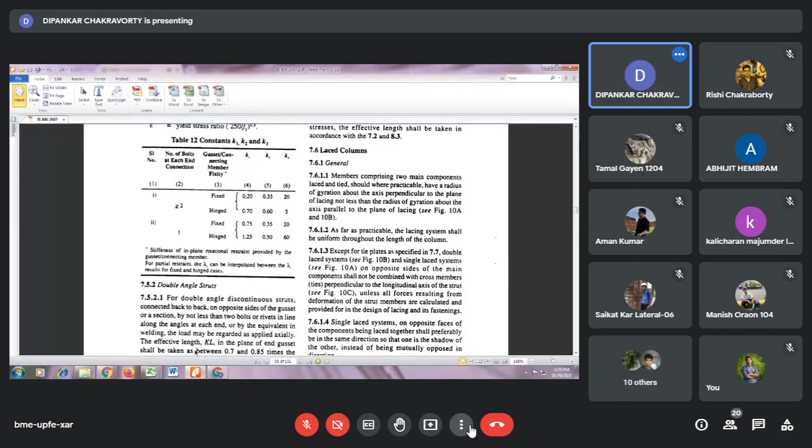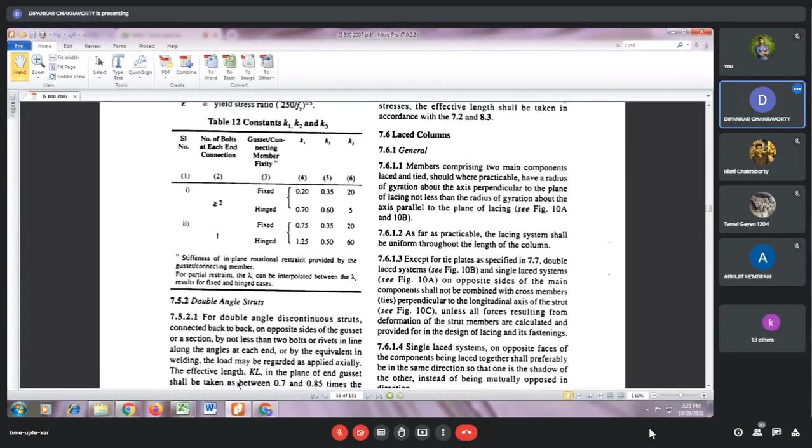If you want to make a compound column, rather the components of the compound column, to behave as a single unit, then you have to either lace or batten the individual components. The design of lacing and design of battens are very easy topics. Just keep in mind, you can note it down, that batten is basically a small beam and lacing members are basically small truss members.

This you have to remember. I'm repeating: in order to make the different components of a compound column behave together as a single unit, you need to batten them or lace them. Now, lacing members are inclined members which basically behave as truss members, meaning axially loaded members, and batten members basically behave as small beams.

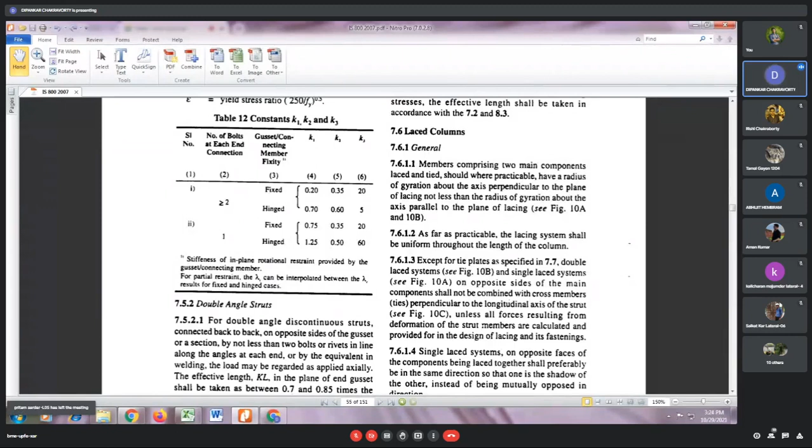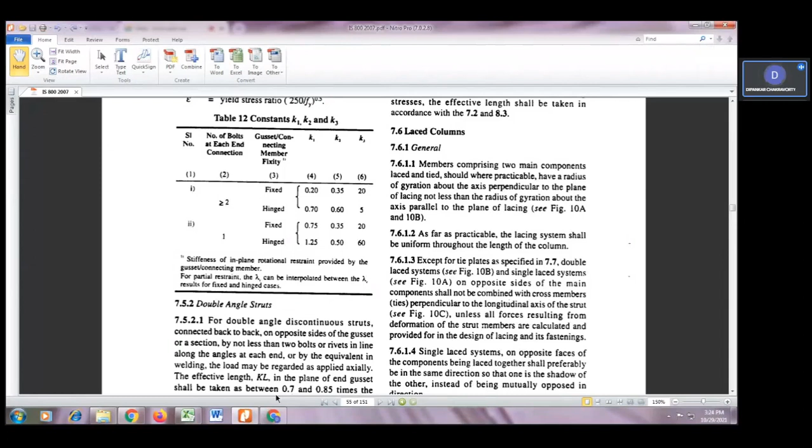Now, if you want to hold two portions of a column together by using lacing or batten, then the lacing or batten system must be capable of resisting a horizontal load which is 2.5% of the vertical maximum axial force on the compound column. I'm repeating: if a vertical compound column has an axial force of 100 kilonewton, then the lacing or batten system must be capable of resisting a horizontal shear of 2.5 kilonewton.

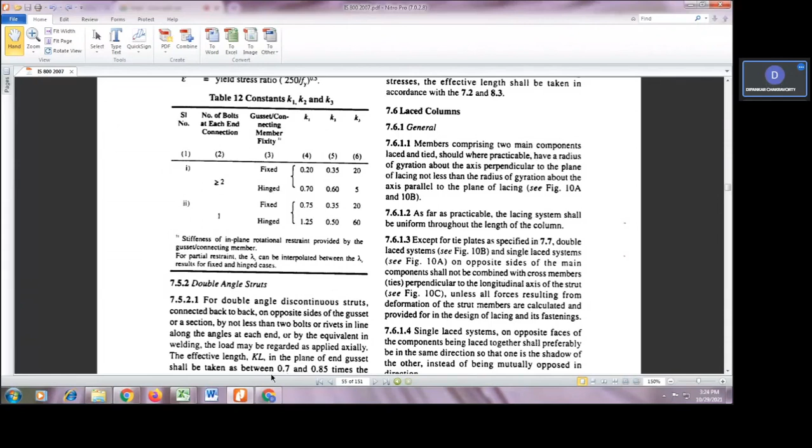Now, in a particular compound column, if in addition to the axial force some shear force is there, which will be there in the present case - in the present case there are wind forces and therefore horizontal shear itself is there - in that case you have to take that horizontal shear and add 2.5% of the axial force. Is it clear to you?

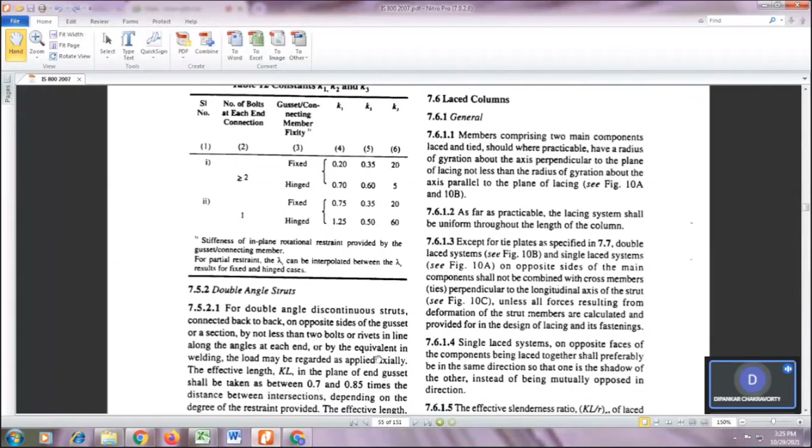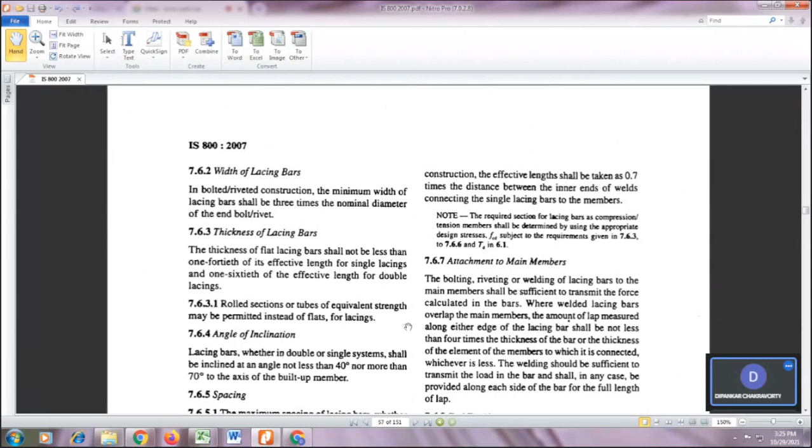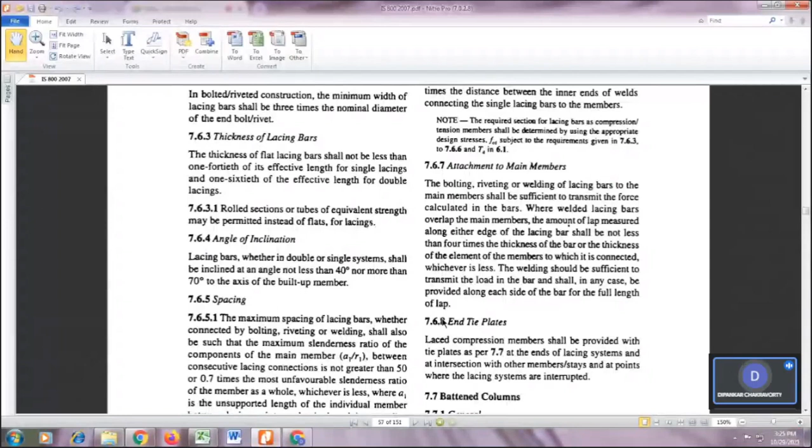Yes sir. Initially I have told you how a lacing or batten plate behaves - they behave basically as axially loaded members, truss members, and beam members respectively. Then I have told you what is the basic design criteria of lacing and batten plates: that they must be capable of taking a horizontal shear equal to 2.5% of the axial force, and if there is actually a shear acting, then that has to be taken also.

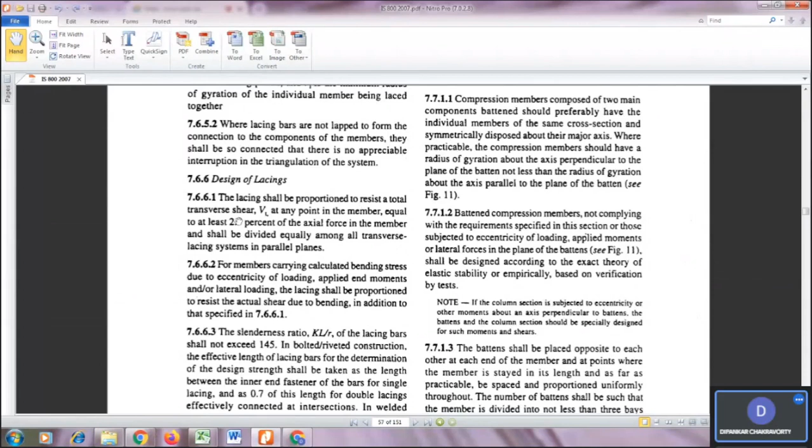Clause 7.6.6.1: The lacing shall be proportioned to resist a total transverse shear VT.

Stop. What does transverse mean? Transverse means any force which is acting perpendicular to the main length of the member. That is called transverse. Continue reading.

At any point in the member equal to at least 2.5% of the axial force in the member, and shall be divided equally among all transverse lacing systems in parallel planes.

Now read clause 7.6.6.2, the next one. For members carrying calculated bending stress due to eccentricity of loading, applied end moments and/or lateral loading, the lacing shall be proportioned to resist the actual shear due to bending in addition to that specified in 7.6.6.1.

Did you understand? So whatever shear force you have calculated - you have solved the compound column, you have solved the crane leg, and therefore you know what is the horizontal shear at the base - that shear you have to take.

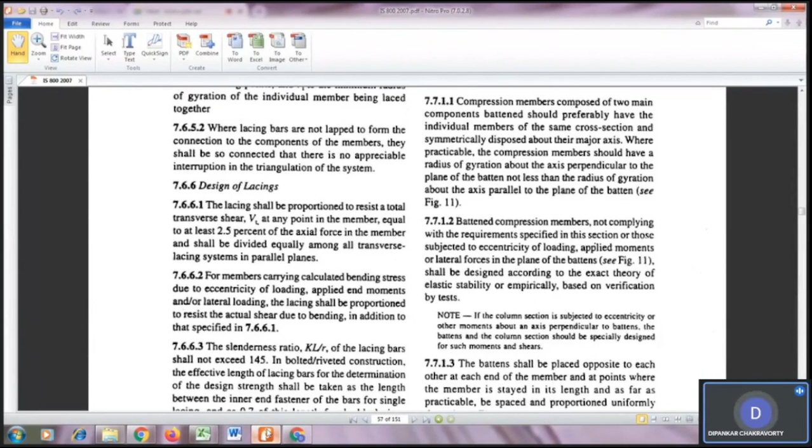In addition to that, the total maximum vertical reaction that you have got in the compound column, 2.5% of that has to be added. So against this particular shear force, the lacing has to be designed.

Now there are certain restrictions so far as the inclination of the lacing is concerned, the thickness of the lacing is concerned, and the width of the lacing is concerned. Okay, just don't worry about it for now.

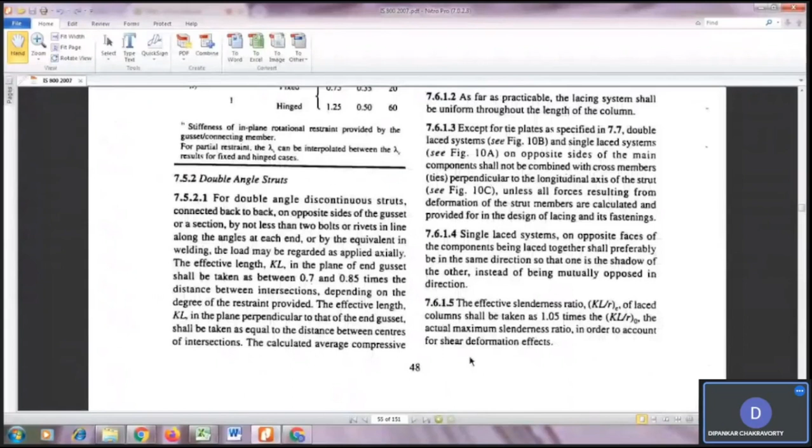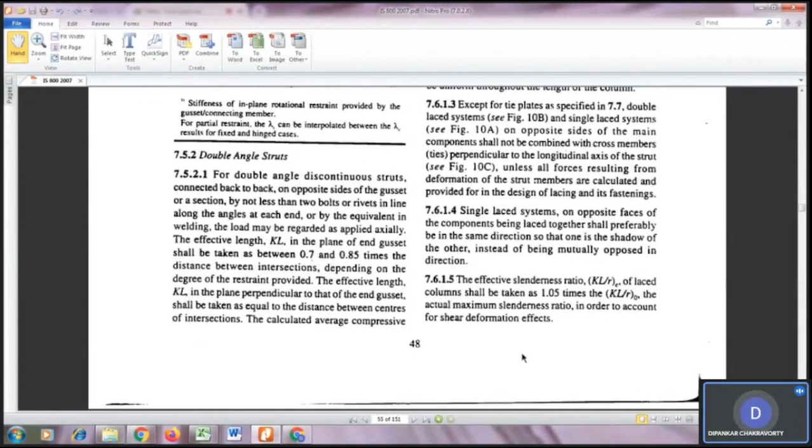The slenderness ratio of a laced column should be increased by 5%. Whenever you are lacing a column, you have two columns side by side, then they are laced. So you calculate Ixx and Iyy, then Rxx and Ryy, and then lambda xx by lambda yy along the two directions, and you multiply them by 1.05.

In bolted or riveted construction, the minimum width of lacing bars shall be 3 times the nominal diameter of the end bolt or rivet. Right.

So the width of the lacing bar has got a minimum width restriction, but since we are welding it, there is no minimum width, but we can go for an approximate width.

I'm elaborating. You tell me, in your compound column, what was the section of the individual legs? The compound column consisted of two members, so what are the sections of the individual legs?

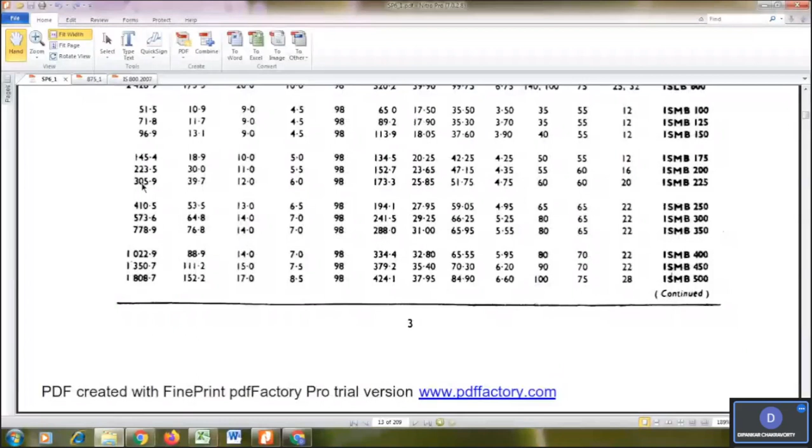সেটা কি তোমরা দেখেছো? হ্যালো, তোমরা এটা দেখতে পাচ্ছো? Is it visible?

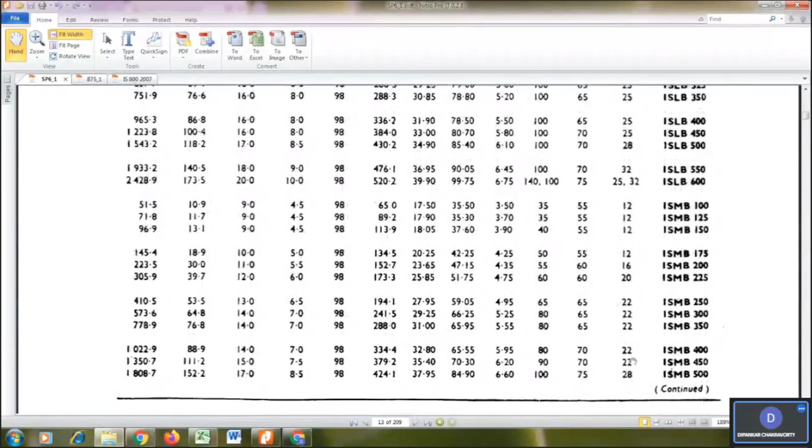Yes sir. Okay. Say for example, your individual members are ISMB 500. So if it is ISMB 500, then you see the maximum size of flange rivet কত বলো? কত? 28. And therefore তোমার লেসিং থিকনেস কত হবে বলো?

লেসিং প্লেটের উইডথ কত হবে? 3 into 28, তাই তো? 3 into 28 is 84. You can go for 100 mm width of lacing plate.

Got the idea? In this particular case, we are not using bolts, we are not using rivets, but just to get a tentative idea, you know the section which you have used. Corresponding to that section, what rivet is suitable, although we are not using rivets, but you can get the diameter of the rivet which would have been required, and thrice of that will give you the width, but that is the minimum width, so you round it up to a decent figure.

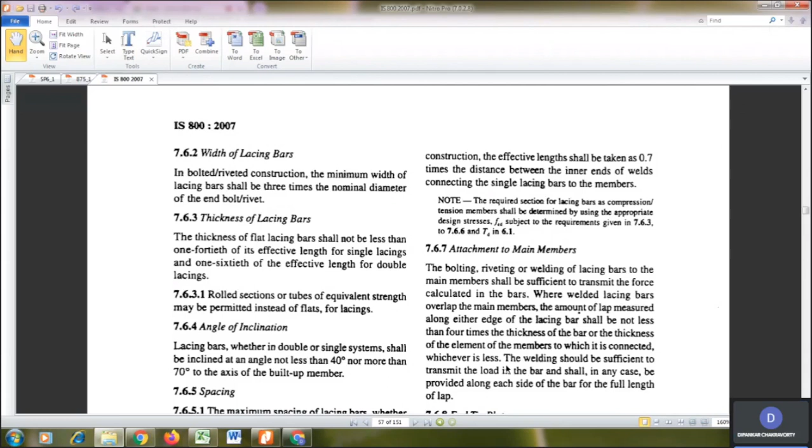Okay, now come to thickness of lacing bar. Rishi, পরেরটা কি বলেছে? The thickness of flat lacing bars shall not be less than 1/40th of its effective length for single lacings and 1/60th of the effective length for double lacings.

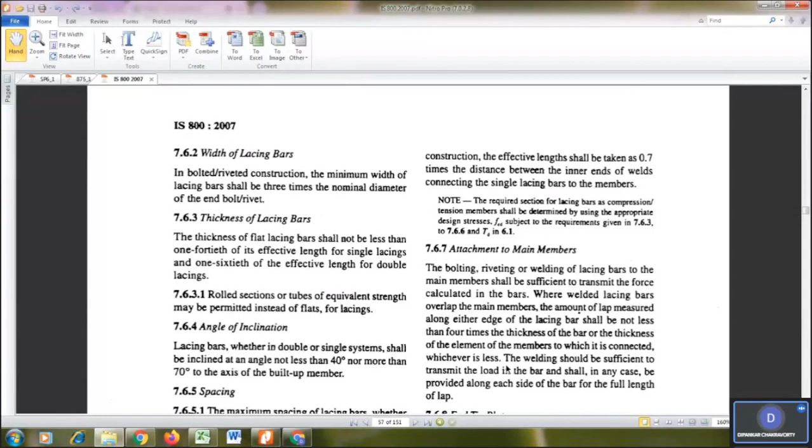Right. আচ্ছা, you tell me that the thickness of the lacing bar shall not be less than 1/40th of its effective length। আচ্ছা, এবার কি হচ্ছে শোনো, if you look at the lacing plates, if you look at the diagram of the lacing plates, you can either bolt them or you can weld them।

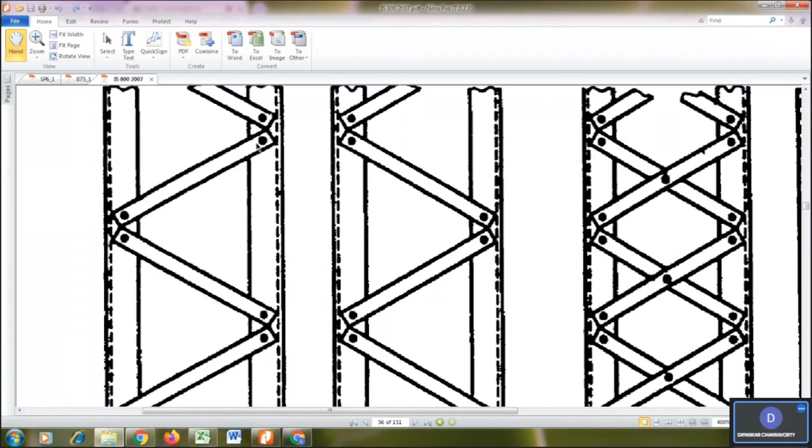Now if you weld them, please look here, if you weld them, then you will weld it all around, তাই না? You will weld it all around। Now if you weld it all around, then a fixity will be created। Now if a fixity is created, then whatever geometric length is there, you can take the effective length as 0.7 of that length। Now let us see what effective length the code has specified।

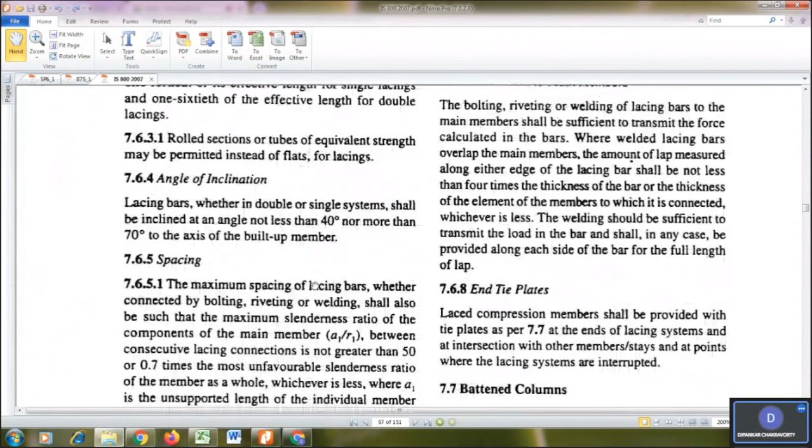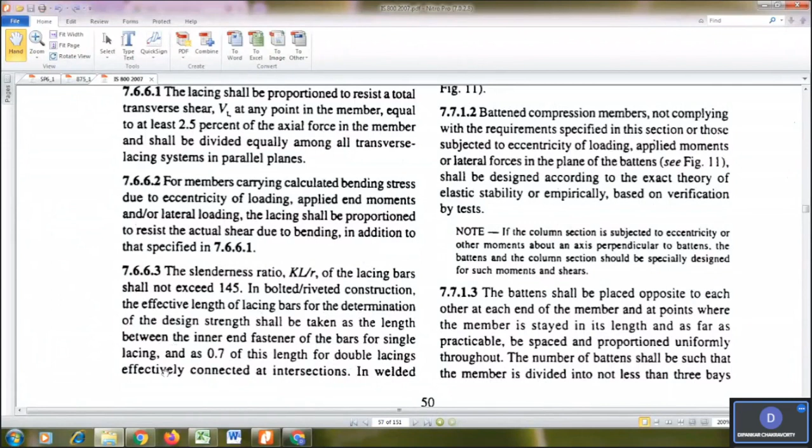Effective length দেখো কোনো কিছু বলেছে? রাইট, ঋষি এই জায়গাটা জোরে জোরে পড়ো। ইনওয়েল্ডেড বলো, ইনওয়েল্ডেড পড়ো।

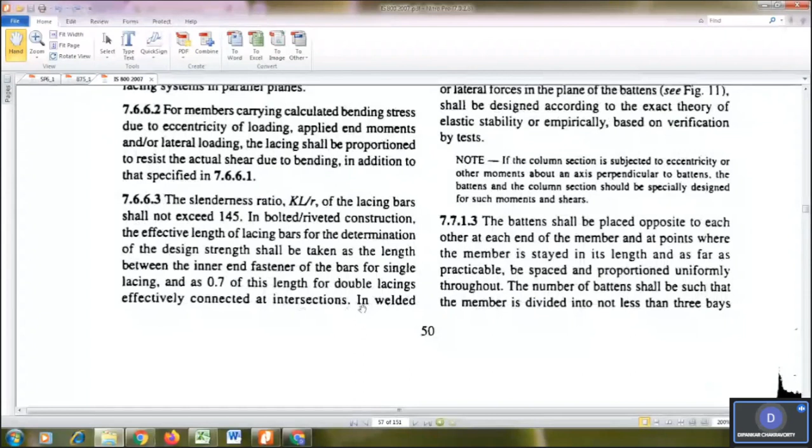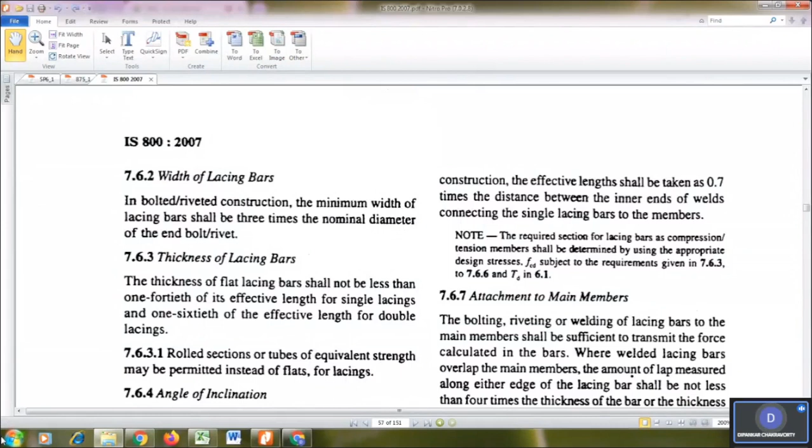In welded construction, the effective length shall be taken as 0.7 times the distance between the inner ends of welds connecting the single lacing bars to the members। Right, inner ends of the weld, তাহলে বুঝতেই পারছো ইনার এন্ডস মানে হলো, এই যে লেসিং প্লেটটা আছে, এই যে জায়গাটা ইনার এন্ড, আর এই যে ইনার এন্ড, you take this length and multiply it by 0.7। Okay, so then you get the effective length।

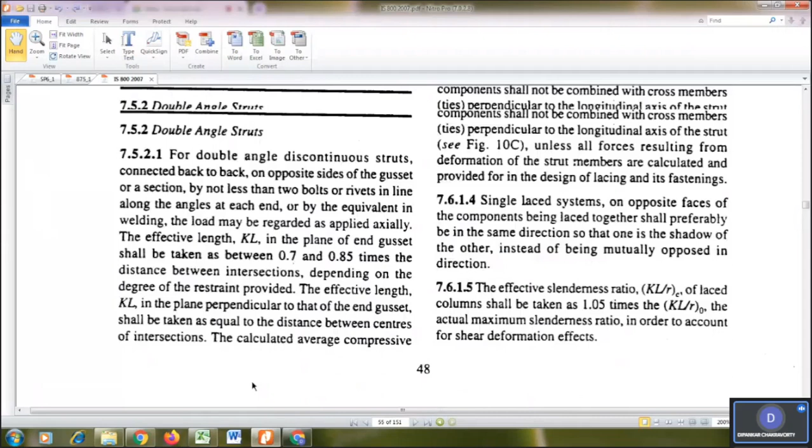Now you tell me, you know the effective length, so once you know the effective length, then for single lacing you can divide it by 40। So 1/40th of the effective length, that is the minimum thickness of the lacing bar। But obviously you can provide something more। If you get say 12.2 millimeter or whatever, you can provide 16 millimeter thick or 20 millimeter thick plate।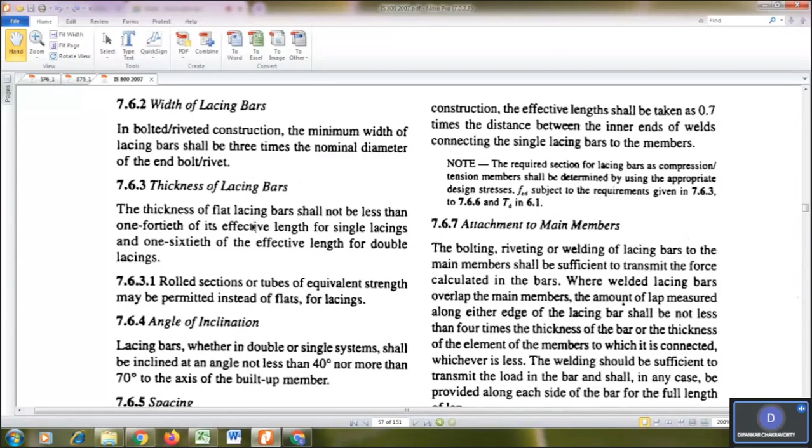So the cross section of the lacing bar, now I know the width, I know the thickness, so the cross section I know। Now how the lacing bars will be placed, এটা একটু পড়ো, জোরে পড়ো।

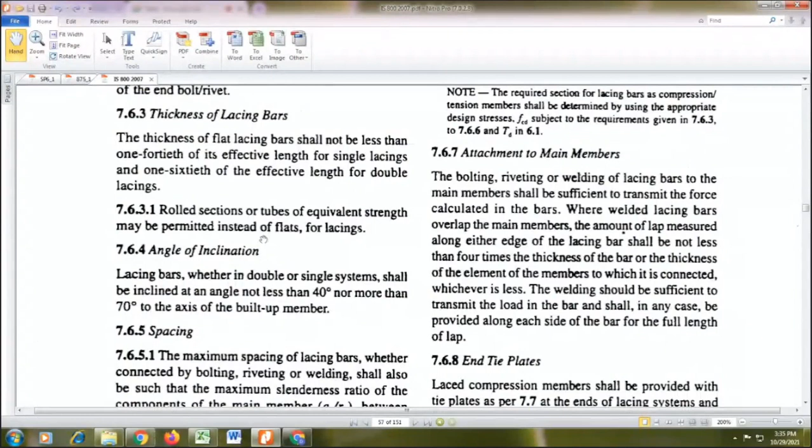Lacing bars, whether in double or single systems, shall be inclined at an angle not less than 40 degree nor more than 70 degree to the axis of the built-up member। Axis of the built-up member, তার মানে হলো এই যে axis, তো এই axis, বুঝতে পারছো, vertical axis, এই যে axis।

So you have to see that the inclination of the lacing bar shall be between 40 degree to 70 degree with the axis of the main member, which I personally normally make as 45 degree। তোমরা বুঝতে পেরেছো না পারোনি বলো, please tell me।

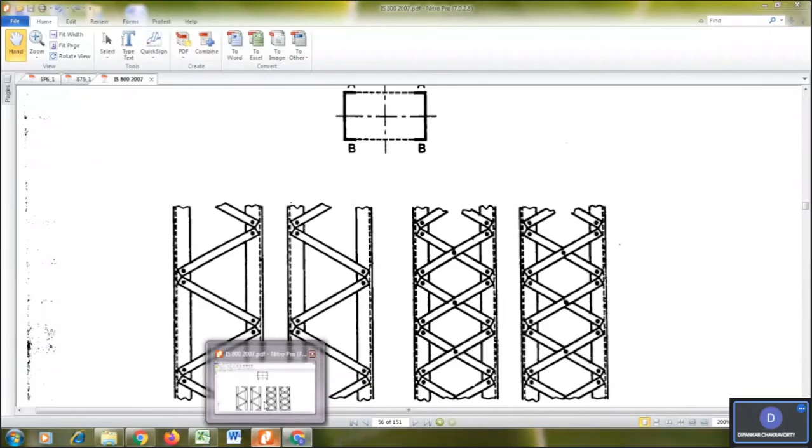So the orientation is known, but there is another criteria, which is this criteria, which is very important। ঋষি পড়ো জোরে জোরে। The maximum spacing of lacing bars, whether connected by bolting, riveting, or welding, shall also be such that the maximum slenderness ratio of the components of the main member between consecutive lacing connections is not greater than 50 or 0.7 times the most unfavorable slenderness ratio of the member as a whole, whichever is less।

Right, whichever is less। আচ্ছা, এবার শোনো, you know that, see, we have connected the members by lacings, but between the lacings this portion is unsupported। Do you agree?

This individual leg is unsupported between the lacings. So for this single member, you take the RYY value, that is the worst RYY value. And if you take the entire column, meaning the compound cross section, multiply that by 1.05, because in a laced column the slenderness ratio must be multiplied by 1.05. You take the entire column, calculate lambda xx and lambda yy, and multiply the greater lambda, because worst lambda means greater lambda, by 1.05.

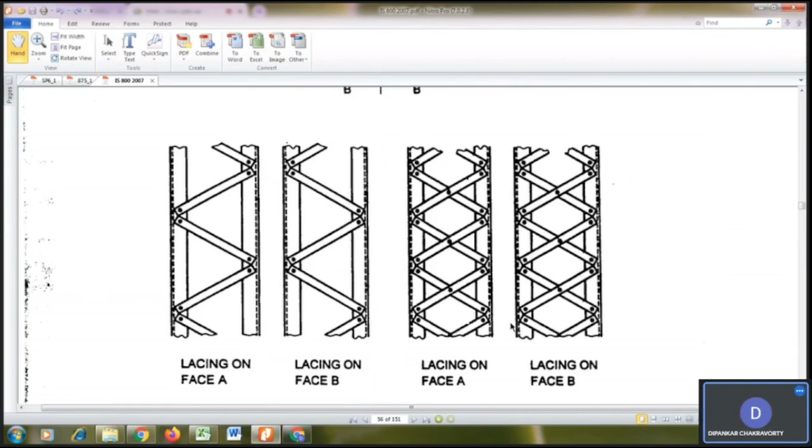So try to understand what this clause is telling. Listen carefully. They want you to keep the inclination of the lacing at an angle between 40 degree to 70 degree with the axis of the main member. Moreover, the portion of the main member between the lacing connections - that is, the part between two lacing points - if you take the slenderness ratio of that part, it cannot exceed 50, and it cannot exceed 0.7 of the most unfavorable slenderness ratio of the member as a whole.

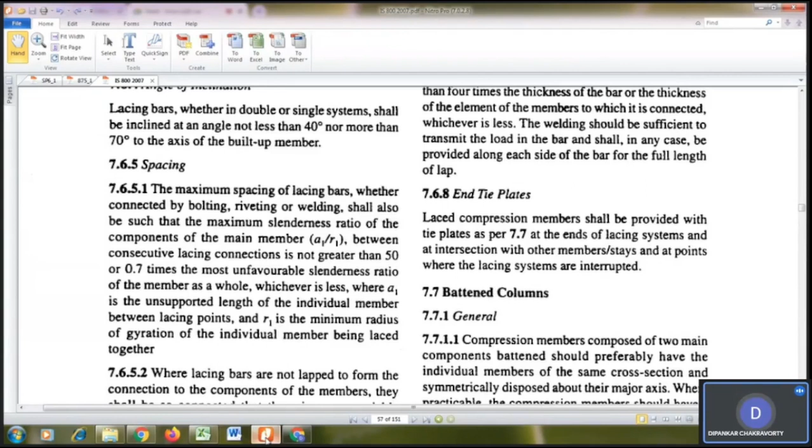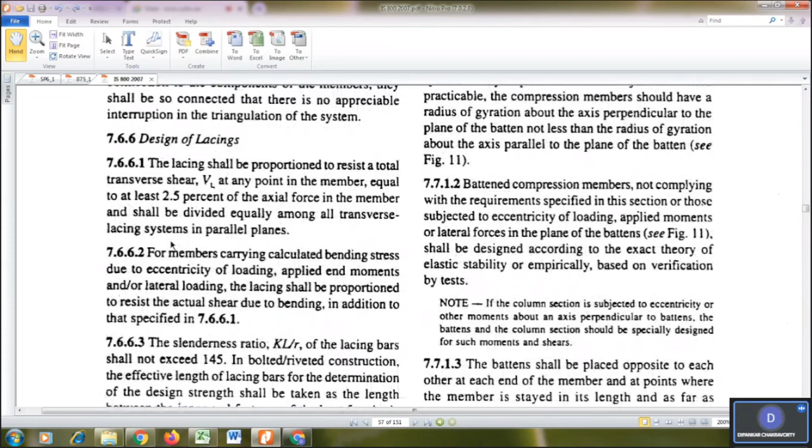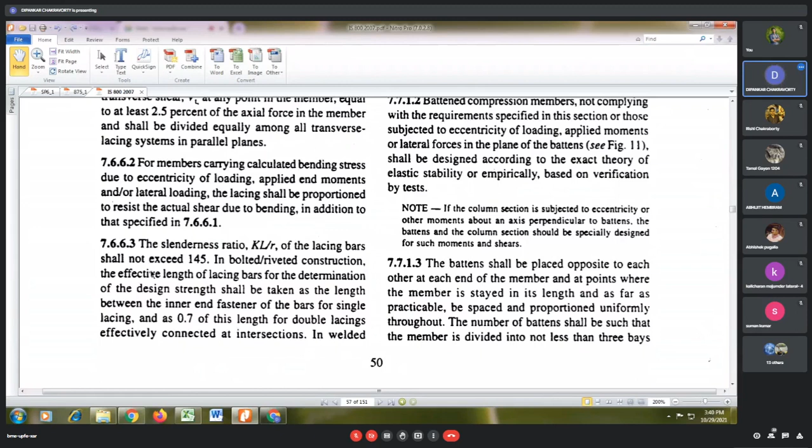Come on, push ahead. So my configuration is totally complete, and I know what force I have to take - 2.5% of the axial force plus the horizontal shear. Now, as I told you, the lacing members should be designed as compression members and tension members, and you know that if a particular member is safe in compression, it is always safe in tension if the force is the same. Now I will come to the force, and then I will tell you how to design it.

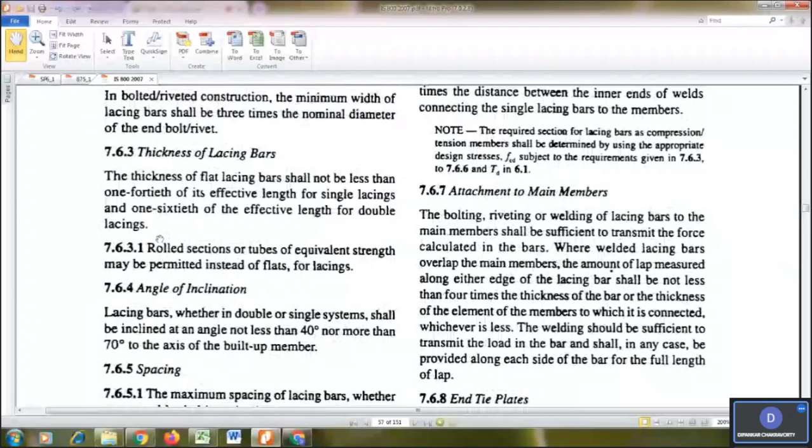Just hold for a second.

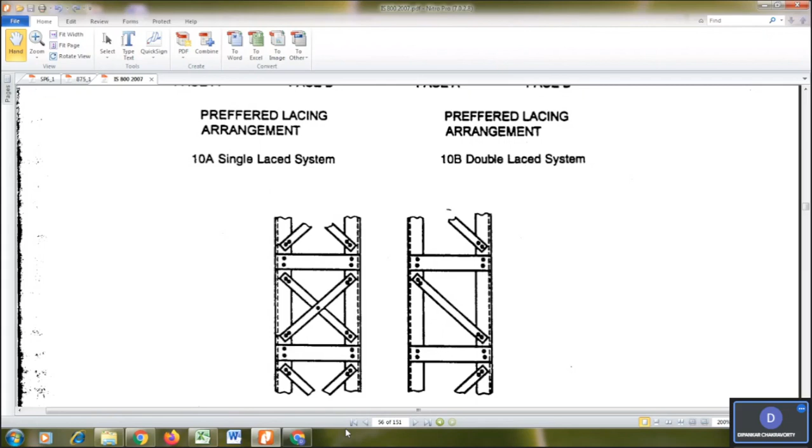Please look into the figure which I have sent you. Have you received it? Yes sir, you have seen the figure?

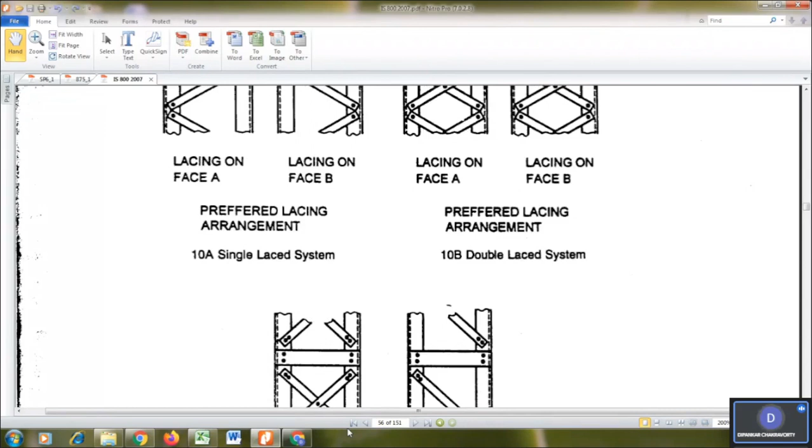Okay fine, I have written VT. You know what VT is - VT is 2.5% of the axial force plus the actual shear. Now see, if we look at the plan, we'll have lacing here and lacing there also. So there are two planes of lacing, and therefore I have taken VT by 2. Is it clear? Yes sir.

Okay, now when that shear is acting away from the member, the lacing members will be subjected to tension, and when the shear is acting towards the column, the lacing members will be subject to compression. The value of theta, which lies between 70 degree to 40 degree, I normally personally take as 45 degree, but I always check whether the slenderness ratio of the individual component is less than 50 or 0.7 times the worst slenderness ratio. So please tell me whether you can solve for the tension and compression, which will be of equal value, equal magnitude.

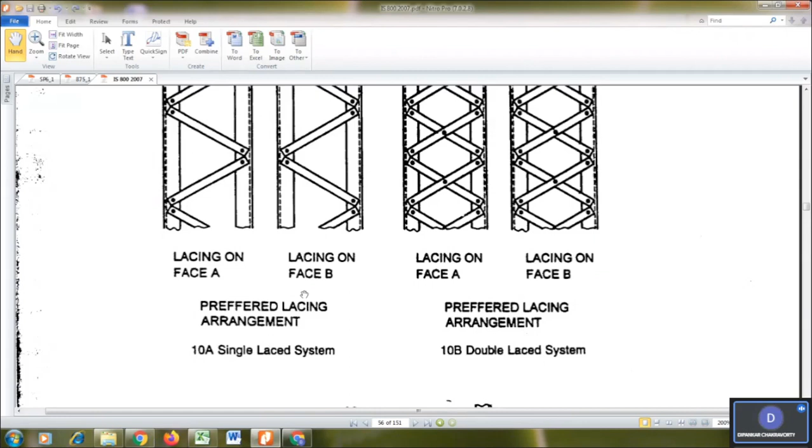Can you solve tension or compression value? Yes sir. Okay, now tell me - you know the cross section of the lacing member, you know the axial force acting on the lacing member, you know the slenderness ratio of the lacing member L by R. Now tell me, can you design it as a compression member?